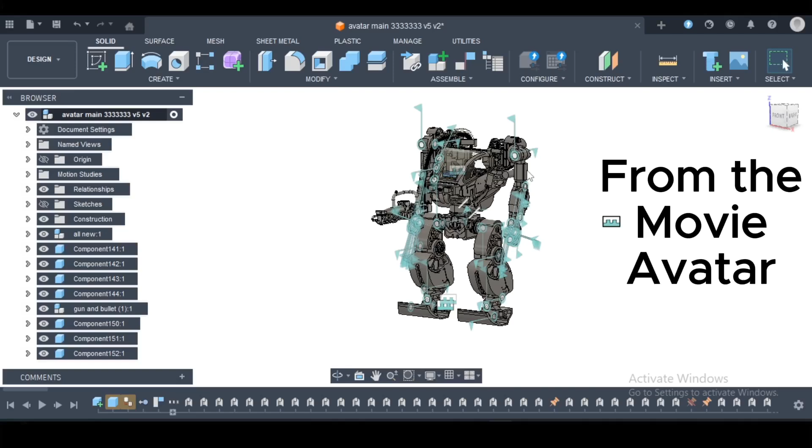I have this awesome AMP suit with working joints. It was made in Fusion 360.

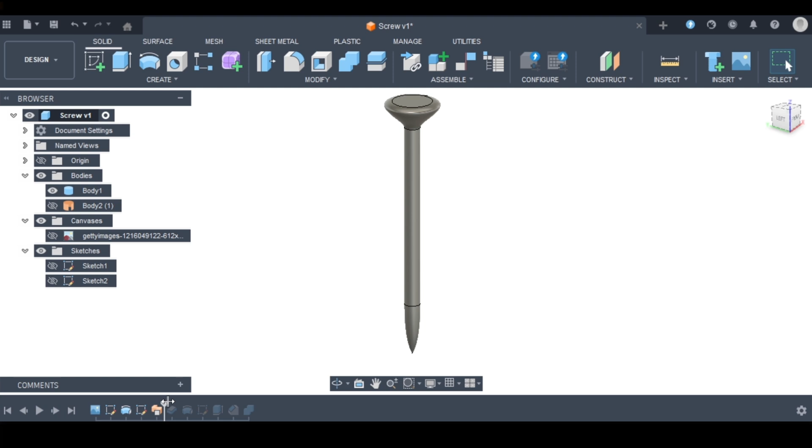How to create this screw in Fusion 360. I'll use a reference image for this. First I will create the body. I'll also create the threads separately. Then I will add some finishing touches.

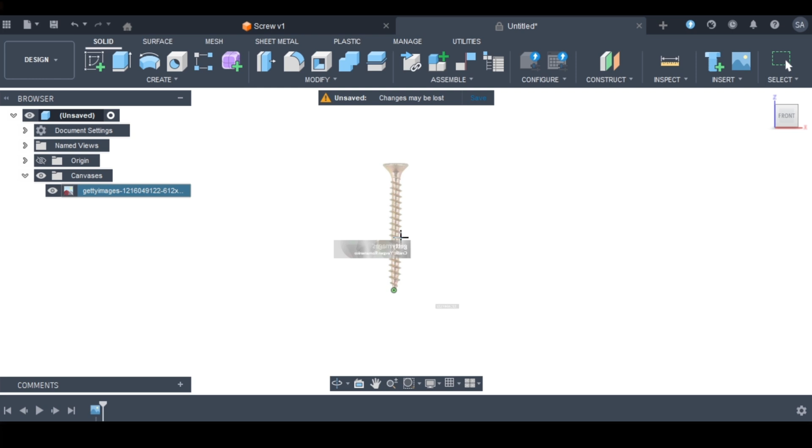I'll import the image using Canvas. I'll calibrate the image and set it to like 50 millimeters. Create a sketch. Align the image with the Z-axis. Right click and edit.

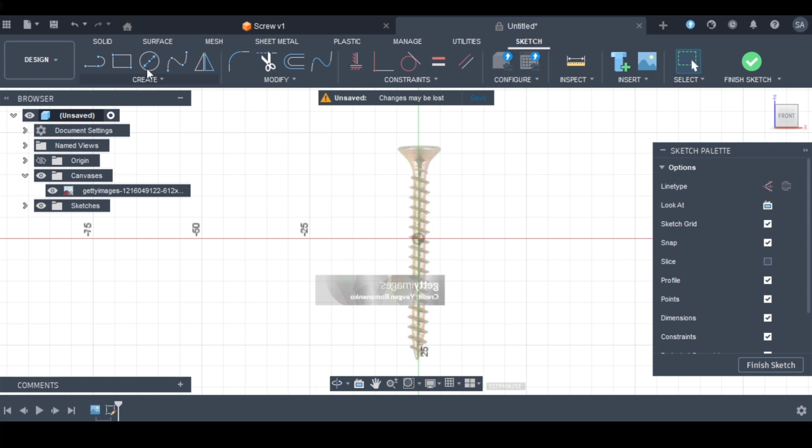I'll draw the outer shape of the screw using the spline and the line tool. For this, just follow me.

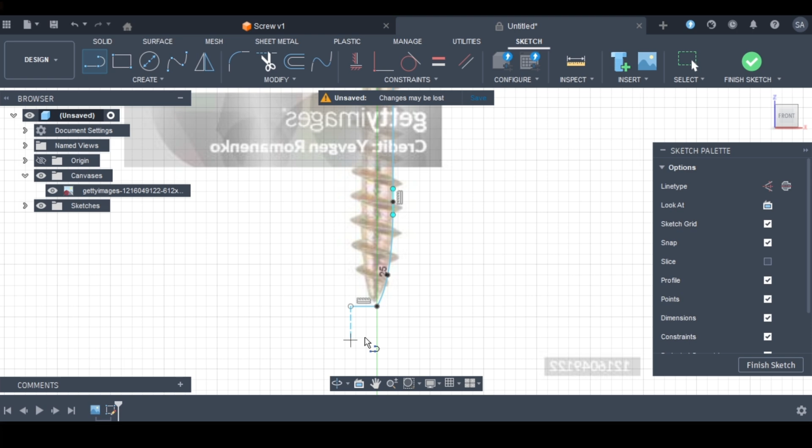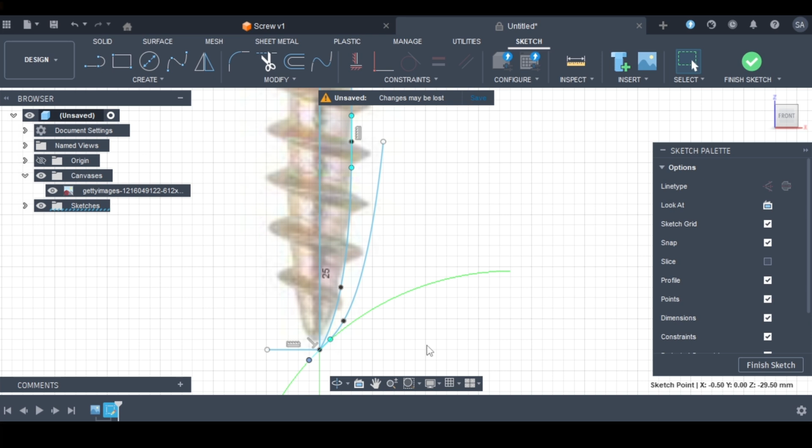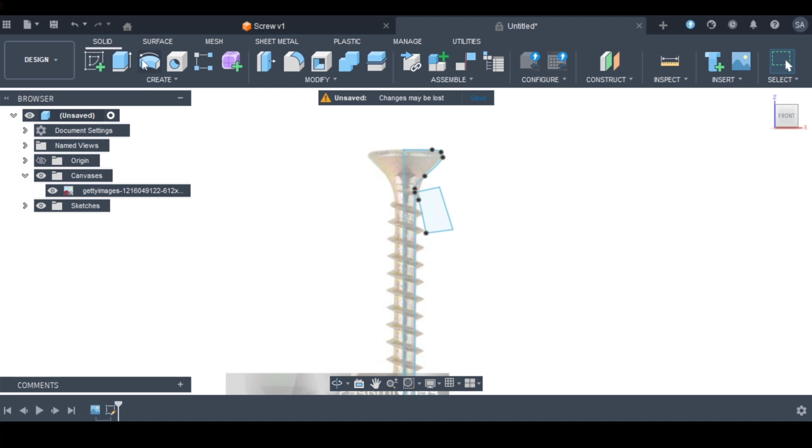After closing the shape, I'll draw these paths. It will make sense later. To complete the body, I'll use the revolve tool.

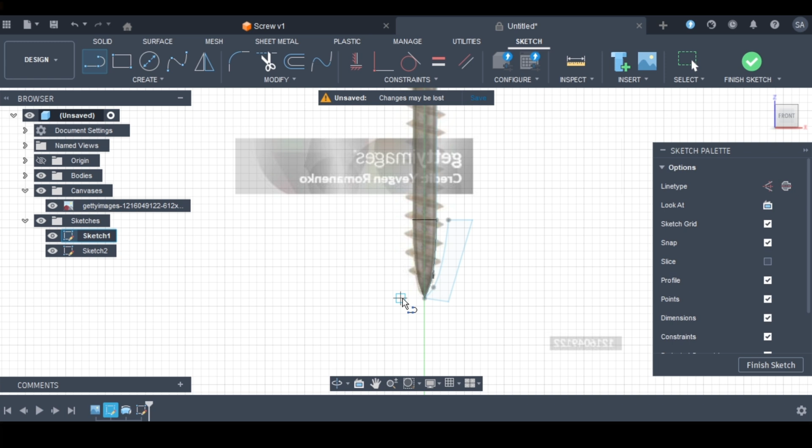I'll go to the surface and create a new sketch. A horizontal line and a vertical line like this. Sweep and select the profile and the path and set the twist angle like 6000.

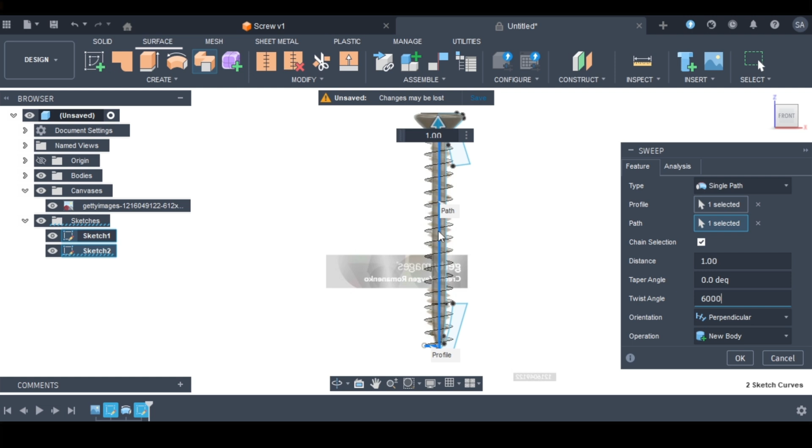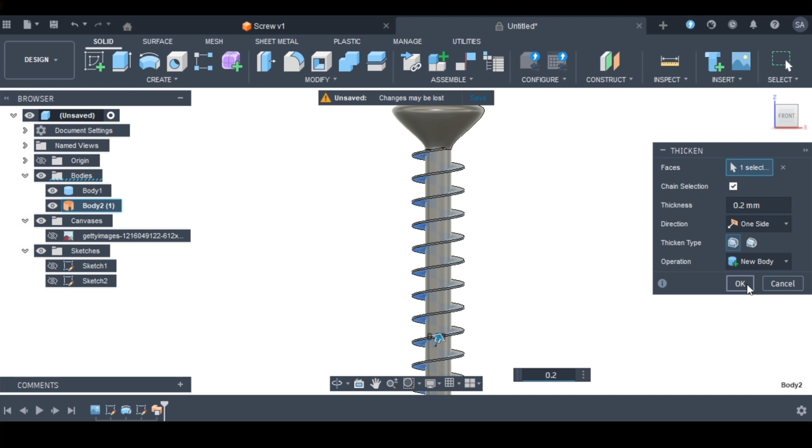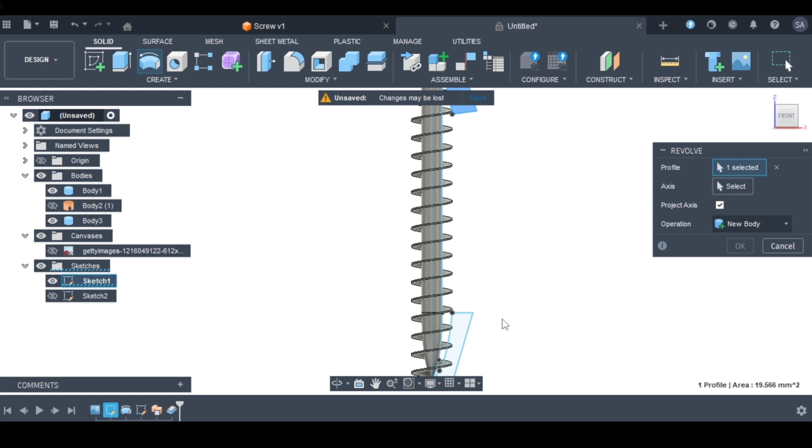I'll go back to the solid and set a thickness to the surface body. I'll set the thickness like 0.2 millimeters. I'll adjust the thread height a bit. I'll use the revolve again to create the final shape for the thread.

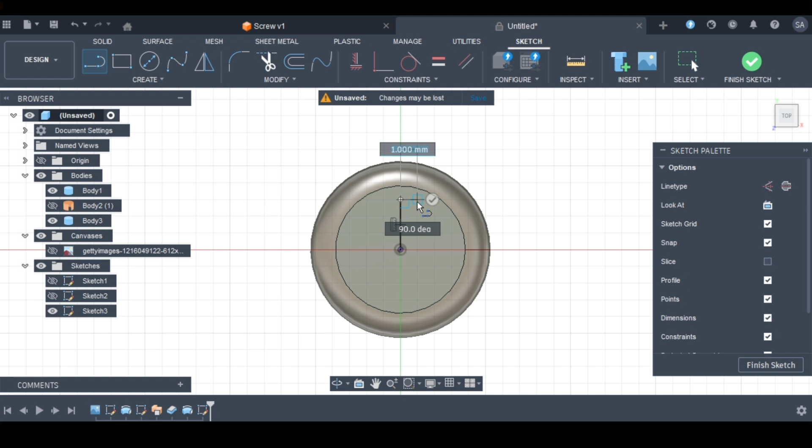I'll create the plus shape in the top of the screw for the screwdriver, using the rectangle and the circular pattern. And E for extrude and at a little bit of angle.

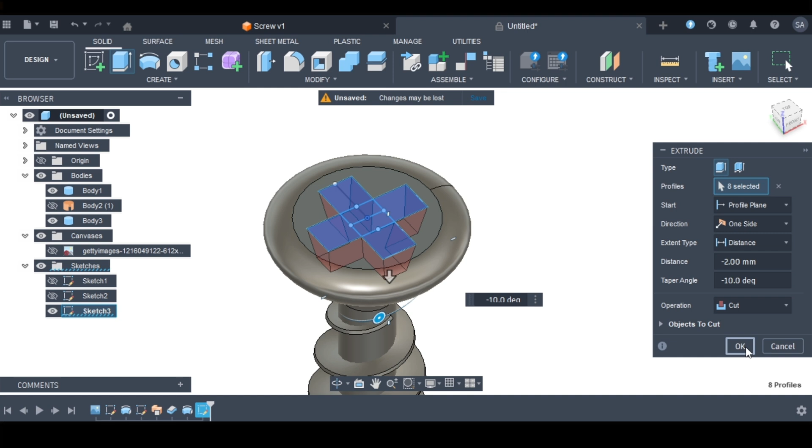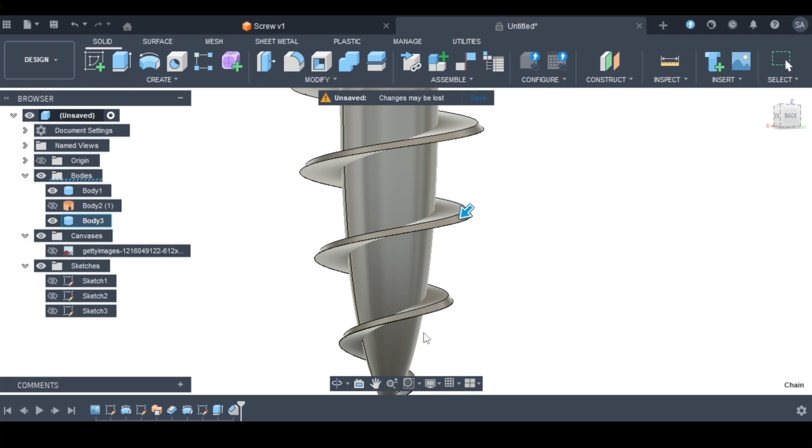Now I will make the threads a bit sharp using the chamfer. And give it like 0.2 and hit OK. I'll combine the body and the threads using the combine tool. And that's it.